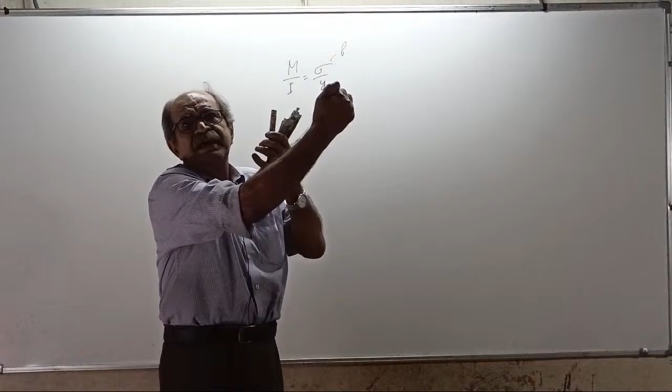M by I equal to sigma by Y. Of course in RCC you don't write sigma, you write F, that's all - sigma or F by Y. But in RCC we don't use this equation. We consider resultant compression, resultant tension by force equal to average stress into area, locate the line of action, then the internal couple - we get the equation there. Not like M equal to sigma into I by Y, but in RCC we get M equal to B x Fc by 2. Fc is nothing but sigma, into D minus X by 3. The other equation is M equal to Ast into Fst, into D minus X by 3.

Here I asked a question - moment of inertia is not considered. You all agreed. Then I told, it is considered, you're just not able to see it. Don't include me, I can see it. If I look there, I can see moment of inertia there. Problem is, people will ask, sir where? There. No sir, it's not there. It is here, sir, I.

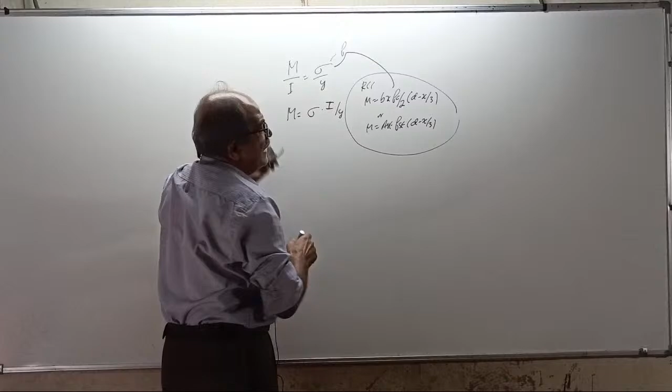See, here you can tell strength of materials I is there. There I is not there. It is there - if it is not there, I will tell you why it happened. I don't want to disclose the place, etc.

Some reputed place, I saw a class online, not now - I won't tell when. Some student asked a doubt, around 1.5 years earlier, during COVID time. He asked, sir, in RCC can't we use the basic bending equation, M by I equal to sigma by y? First answer came within no time - I do not want to tell where, who, etc.

Sorry, if he is seeing the video he will make out, others may not. The answer came: no, you cannot use moment of inertia there. I felt pity for that. See, reputed place, he told we cannot use moment of inertia there.

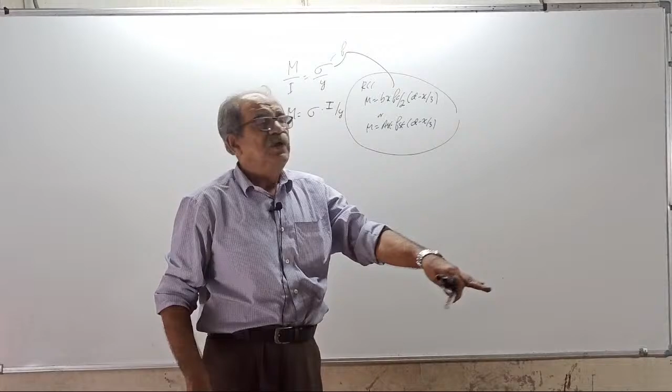RCC separate principle - what separate principle? Both are same. That's why I solved a question by the strength of materials basis, an RC question, and also solved it by the RC equation. Now I asked a question.

Something else, minus is minus. Breadth into distance into stress, same there also - nobody in the world can change it. So anyway, that is the modified version. There you cannot use strength of materials, but you can use strength of materials, you have to go for more rigorous calculation. You can use it.

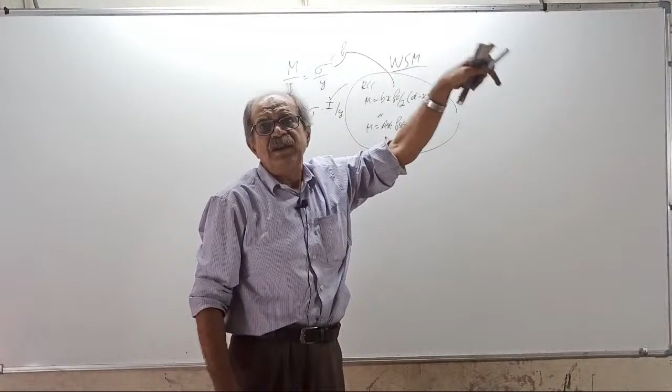Now my question is: did I use it or not? All of you told yesterday no. Then I told, used - tell me where used. So far no answer came. People who are asking for brain teaser, answer it.

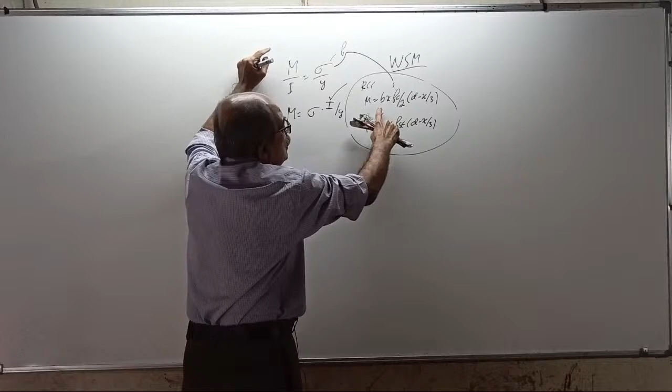I asked you at the end of class yesterday, do you want to get this equation by considering moment of inertia? In RCC, compression area B into X, average stress FC plus 0 divided by 2. Bx FC by 2 is the compression force. D minus one-third X - why? Resultant compression acts at one-third of the triangle, one-third of that X. So lever arm is D minus X by 3. You get M. The other one, AST into FST, tension force in tension steel, into lever arm D minus X by 3. This we derived - nowhere did we use moment of inertia.

So somebody answered that way - you cannot use moment of inertia. This is my reply for them: those who say moment of inertia cannot be used, it can be used. So then I asked you, do you want it or not? So many told, yes, we want it, please.

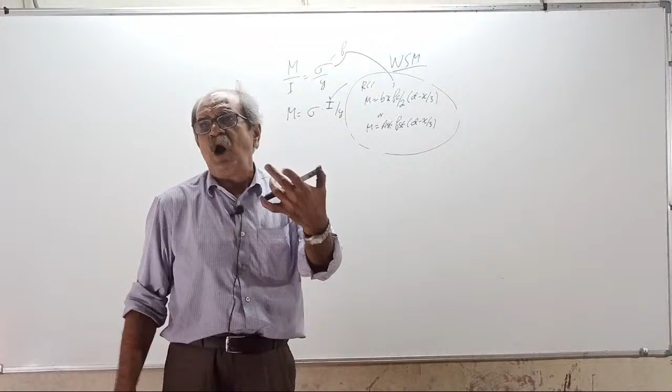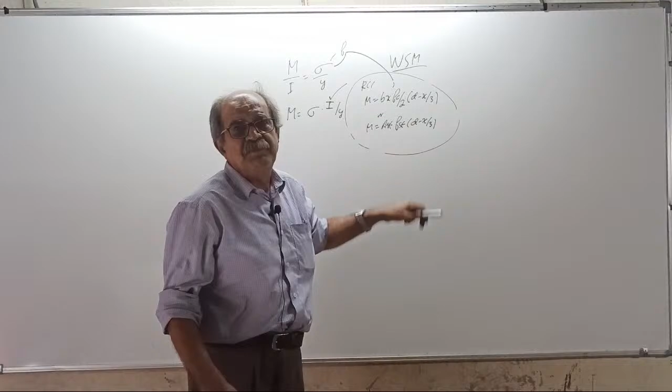Okay, now see the equations, I am removing it now. I will get these two equations now by strength of material concept, using M by I equal to sigma by Y. Instead of sigma I will use F. Okay, see the equation first. Removing now, this will once again appear - I will ask you, is it same as earlier? What I told - you should tell yes, same. You have to tell yes.

Okay, now, one more thing. At the end of today's class I will give one more piece of information regarding section modulus in strength of materials and section modulus in RCC. Some will say, same people, RCC section modulus is not there - what, not there? It is there, I will show it. And in strength of materials, for rectangular section, modulus is, if you remember, Z.

BD - is it capital D? There's no question of small d, capital D here. You can tell BD square by - tell what? In rectangular section, strength of materials, no RC theory - section modulus is, everybody knows this one, BD square by - people know it.

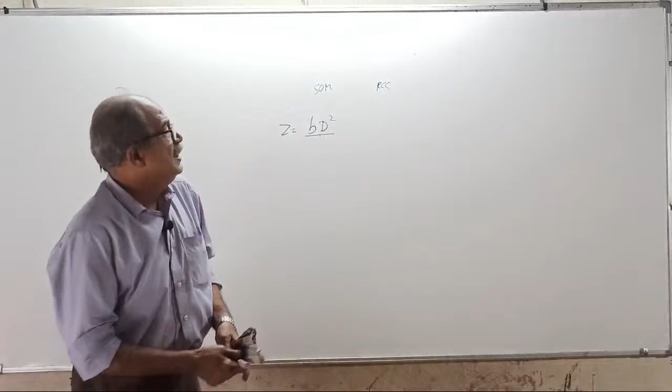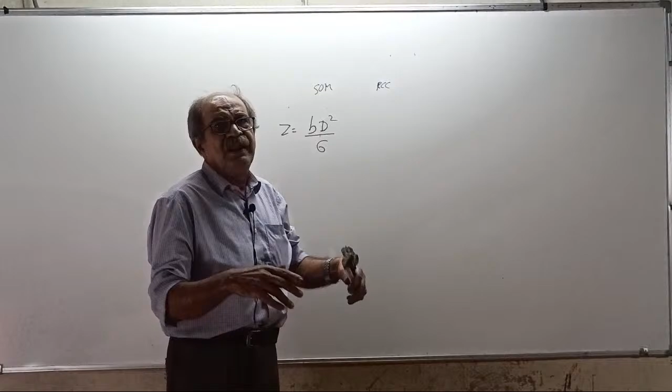6, correct. Today morning I took a class, I asked them, tell me section modulus - they didn't know what section modulus is. When I told them, BD cube by - sir, 12! BD square by 6, sir! Why? Sir, it is - we by-hearted it, in steel, in prestressed concrete, so many places we used it, BD square by 6. They don't know what section modulus is, first of all they don't know the meaning. Then I'll ask, what is section modulus? Sir, I don't know - then you told BD square by, sir, 6? By-hearted. WL square by, they will tell 8. I'll say, who told you I want it for a fixed beam? Sir, then 12. No, I will tell 11 by 192 - partial UDL. Oh sorry sir. Or WL square by, I will tell 9 root 3 - triangular load.

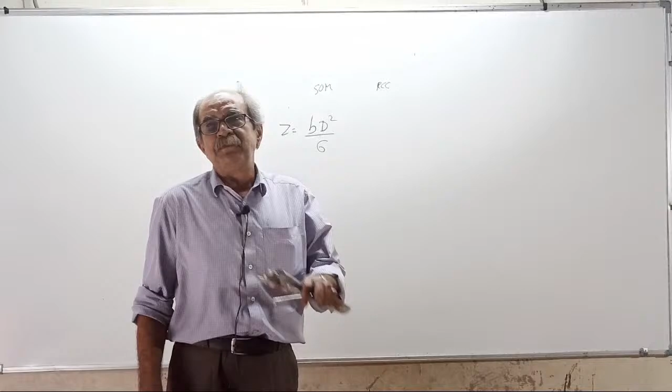Don't commit to an answer unless you hear the question properly. How much? You go to a shop and ask, how much? He will say, how much for what? If a place is selling only one item, roadside, only dosa, you ask him how much, he will tell you 40 rupees because he knows you are asking for dosa. If you go to a hotel and ask, how much? How much for what, sir? For what? See, do not answer the question till the question is completed.

Remember, in my class also, do not comment unnecessarily - I will tell those, unless you know where you stand. Very sorry to tell, sometimes people get into commenting or trying to find mistakes in others. I won't tell the names, I don't want to tell. They think that what they know is too much.

For them, my advice: do not comment that way unless you realize where you are, improve, and reach a level from which you can comment. Not just knowing a little and commenting. Someone actually challenged me earlier, asking can you solve it in 1 minute? I said I can solve it in 1 second. He said then tell me. I said I need not tell you, who are you to ask? I won't give names, but I saw those things. He said nobody can tell me, then show it. I said why should I show it? If I want to show it, come in front of me, have a discussion with me, then realize. I will see that he runs away from there.

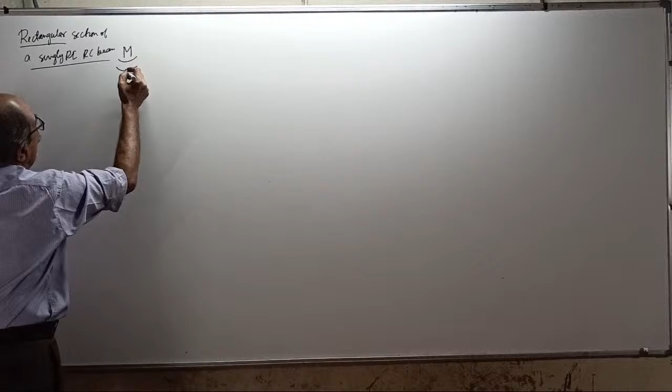Rectangular section of a RC beam. Remember, I am indirectly telling you where moment of inertia is used. Rectangular section of a singly reinforced RC beam, bending moment M, let it be sagging. Why? Because we require compression and tension. Neutral axis is here, not there yet, this is not the neutral axis. Remember, this is working stress method, based on elastic theory, so we cannot go beyond the elastic limit or proportionality limit.

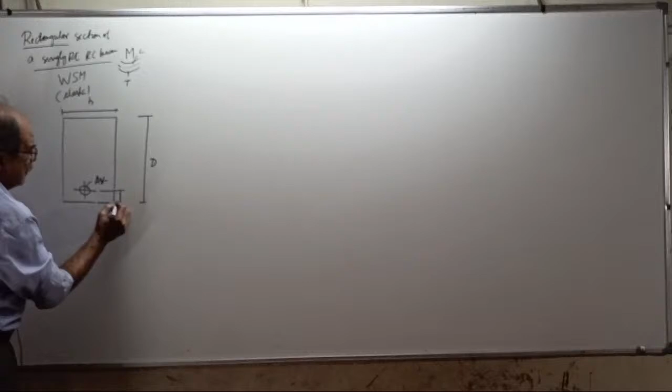See, start, cross section is here, it won't take much time now. This is width B. People ask why the basic bending equation cannot be used for RC. They will get the answer now. This is AST, I will put AST like this. This is effective cover, you write it yourself. So this becomes effective depth d.

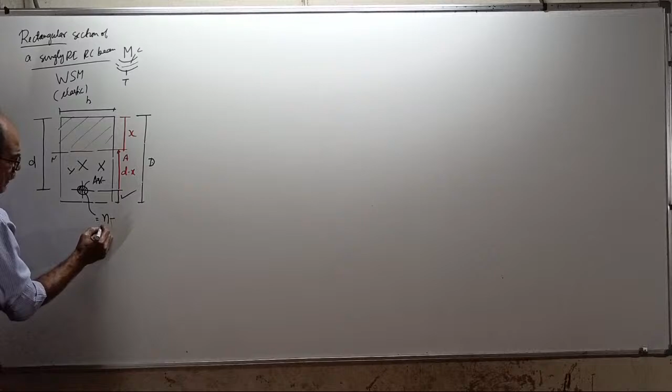Somewhere here, neutral axis. This distance I am calling X. If that is X, this distance will be D minus X. This is the area in compression, this is the area in tension. This is ignored. If AST is the steel area, AST equals number of bars N into the bar area. Suppose it is 4 bars of 20 mm diameter, AST equals pi by 4 of 20 square into 4. Clear? Pi by 4 of 20 square into 4.

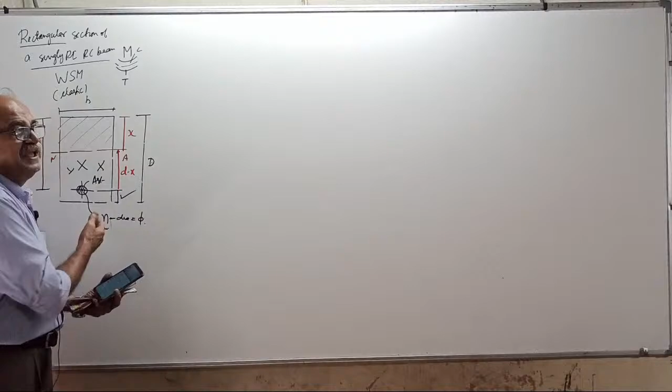Clear? Suddenly there was a sound. Why? He asked why are you explaining again. No, that was some other sound that coincided, sometimes it happens. When I repeat something, they make that sound, and say you already told it, don't tell it again.

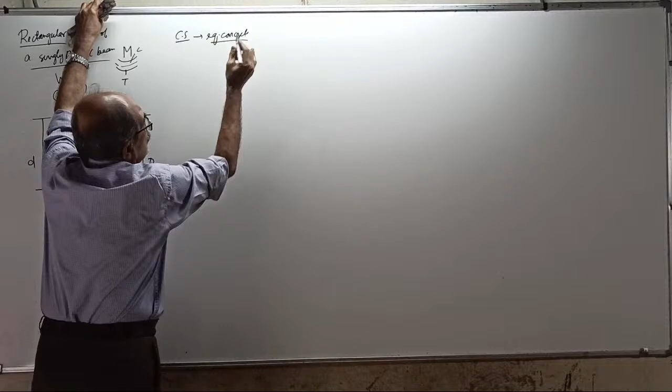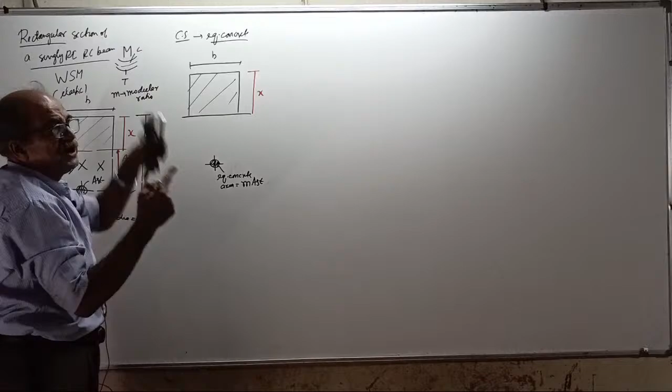See now, consider the cross-section in terms of equivalent concrete. This I already told you, not much new now. Compression is taken by concrete, this is the area, this is B, this is X. X is in red because it's the neutral axis. This is the area of concrete in compression. Somewhere here is AST, the area of steel in tension. So tell me, what is the equivalent concrete area here? Equivalent concrete area equals M times AST, where M stands for modular ratio, as I already told you. I already told you last time so I won't repeat. You should study the previous class. M is the modular ratio. This distance is D minus X.

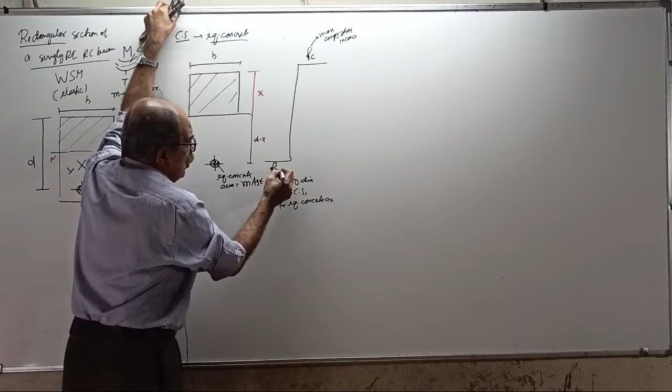Now start, draw the stress diagram here. This is the bending stress distribution diagram across the cross section for equivalent concrete area, that is very important. As I told yesterday, FCC maximum - today for RC I will call it FC, meaning maximum compressive stress in concrete. Here on this side it is stress in steel in tension. But for concrete I will write stress in equivalent concrete in tension, FEQCT, joined by a straight line, passing through the neutral axis, compression to tension. This is for concrete, okay, now start.

Basic bending equation. People say the basic bending equation from strength of materials cannot be used for RCC. Now let's see if it can be used or not.

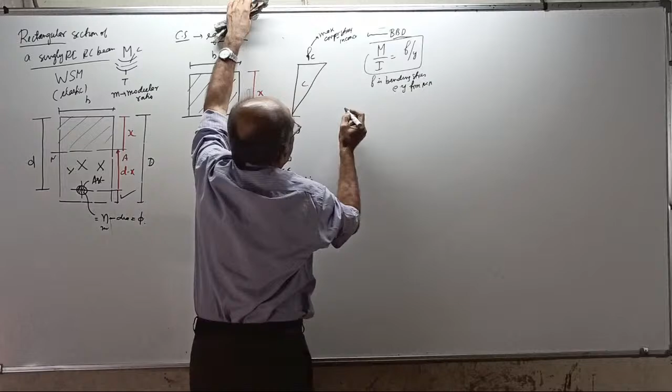Let me see. M divided by I equals, actually there you write sigma by y, here for RCC I write F by y. F is the bending stress at y from neutral axis. That y can be either this way or this way, and now that y and x are different.

Now start. M we want to find, F I will do later. Before that, first you require the value of x. X can be found - that is depth of neutral axis. Neutral axis from, don't say top edge, from extreme compression edge. That is x.

Depth of neutral axis from extreme compression edge - that is called x, can be found by equating moment of compression area of concrete to moment of equivalent concrete area for tension steel, about neutral axis.

Why am I not writing this? Because in yesterday's class or an earlier class I told it. So those who are serious will go and check and write it. Little effort for you also.

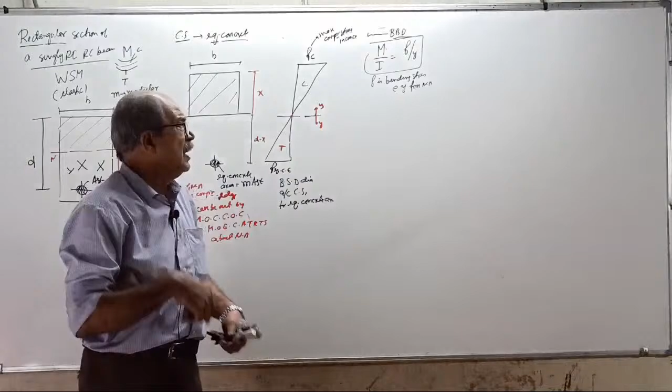That will give you - I already told you, b into x by 2, bx into x by 2 equals this equivalent area, m times ast into d minus x. The corresponding equation, I will put in red color: bx square by 2 equals m times ast into d minus x.

This is pure strength of materials, instead of taking moment about the top edge, we take moment about neutral axis. Last time you know it - both the ways we got the same answer, yes or no? Remember it? Both the ways we got the same answer last time.

Once you got y bar, once the equation, then I gave the simplified form. Yes, therefore leave it now.

Now start. Moment of inertia of the cross section, I want. I about neutral axis for equivalent concrete area - very important. First, I about its own axis, that is bx cube by 12 plus area b into x.

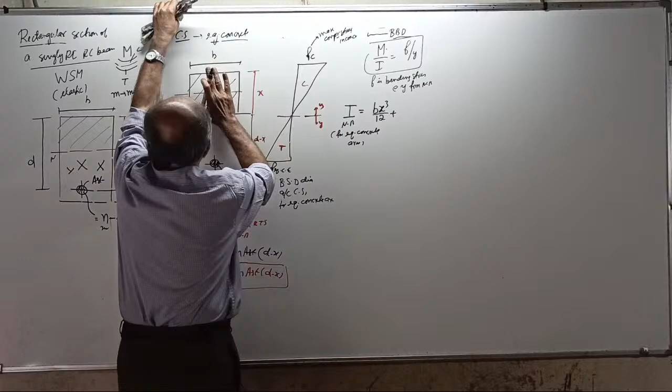If this is not clear, you don't know engineering mechanics - moment of inertia into this distance square, x by 2 square, plus, here n number of bars, let it be n number of bars of diameter phi, therefore pi by 64 into phi power 4.

There can be any number of bars, imagine so many bars are there. For one bar: pi by 64 into phi power 4, plus pi by 4 of phi square is the area, into from CG to here is d minus x whole square. This gives moment of inertia for one bar about neutral axis. There are n number of bars, multiply by n - this gives moment of inertia of n number of steel bars.

I want to convert this to equivalent concrete - tell me, multiply by how much? I want to convert it because that is concrete, I want this also to be concrete. Multiply by m first.

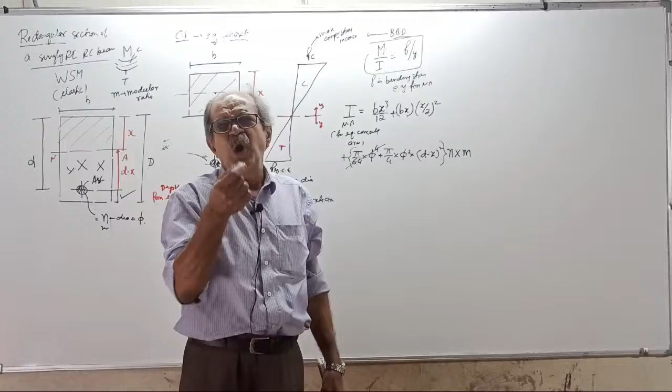Now see, this number you can cut. Tell me why. Because it is so small, negligibly small. You can check later, yesterday's calculation I told you, you can cut this one.

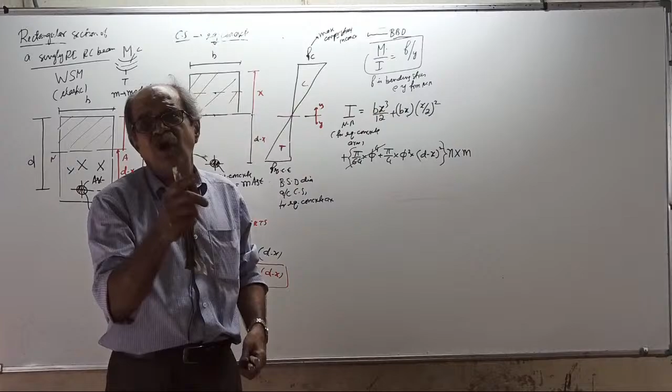If you don't cut, you may get 2 crore 60 lakh 48,000 and 458 rupees. If you cut, you will get 2 crore 60 lakh 48,150 rupees. Someone will say, in a 2 crore transaction, this 200-300 rupees, please leave it, please don't consider. Clear or not? If you want, you check it.

This also I told you - moment of inertia of a circle about its own axis can be ignored if the area is very, very far away. In strength of engineering mechanics, I told this principle regarding radius of gyration.

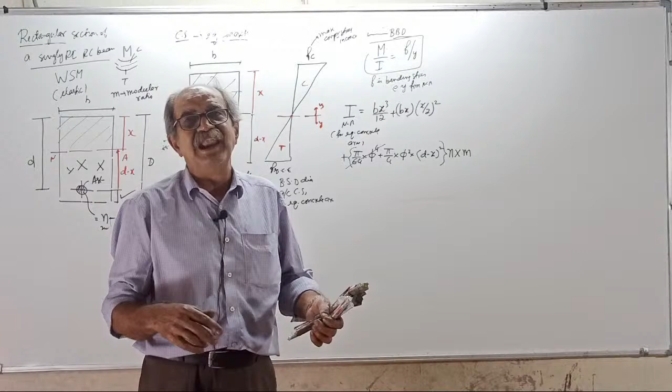See, the term radius of gyration is so powerful. People doing steel structures use it repeatedly, but with regret I have to say majority does not know the real meaning of radius of gyration. They will say, sir, root of I by A - that's the formula. Tell me what is the meaning of radius of gyration. They say they don't know, yet they told you so much about the formula, sir.

Okay, see correctly now. Pi by 4 of phi square is area of 1 bar into n. Tell me what this will give you. Pi by 4 of phi square into n, what will it give you? Pi by 4 of diameter square into number of bars, what will it give you? If you don't know, better not continue the class.

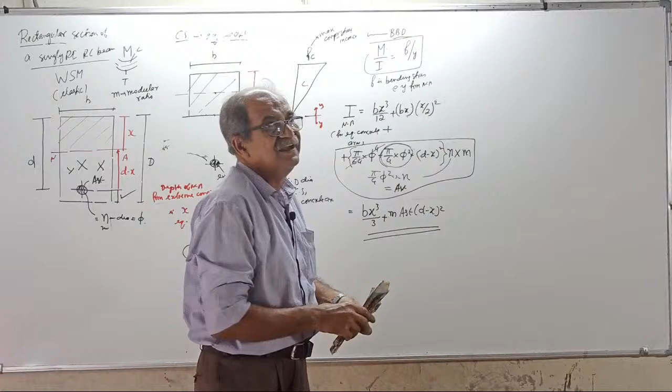Now I will write I once again. So the final result for I is what? I about neutral axis: bx cube by 3 plus m times AST into d minus x whole square. Now I will write it in two different options.

I will do one thing now, I will write this I in two different options, either that way, I neutral axis, or this way. See, start: bx cube by 3 equal to, I will write bx square by 2, x cube by 3 is x square by 2 into, tell me, how much of x? Fast. 3 by 3.

It is bx cube by 3. Bx cube by 3 is how much times of bx square by 2 into... 1 by 6, what is this one? 1 by 3 is 1 by 2 into... what is this mathematics, where did you learn mathematics from? First of all, 1 by 6. Abba, I really feel pity. 1 by 6, I should get back bx cube by 3. Abba, someone told correctly, 2/3 of x.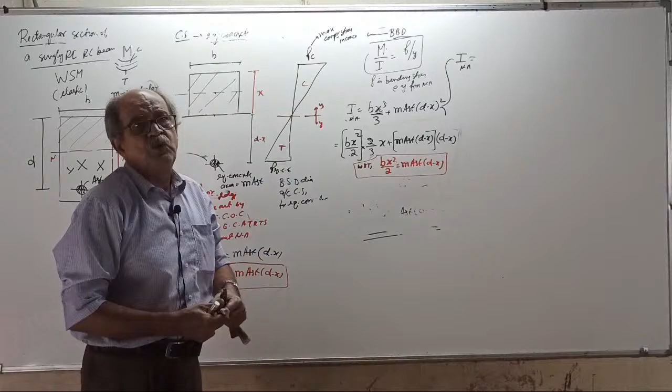Now do one thing. You know that bx square by 2 equal to m times AST into d minus x. Correct? This is for the neutral axis to coincide with CG. See here, already there. Now I will do one thing, once I will replace this M AST into d minus x by bx square by 2.

So if I continue here, option one is your I equal to bx square by 2 into 2/3 of x plus M AST into d minus x. I will once again write bx square by 2 into d minus x. No problem? Tell me, no problem? One option, tell me, any problem? You should tell no problem. Any problem is there, or correct? Any problem, or correct?

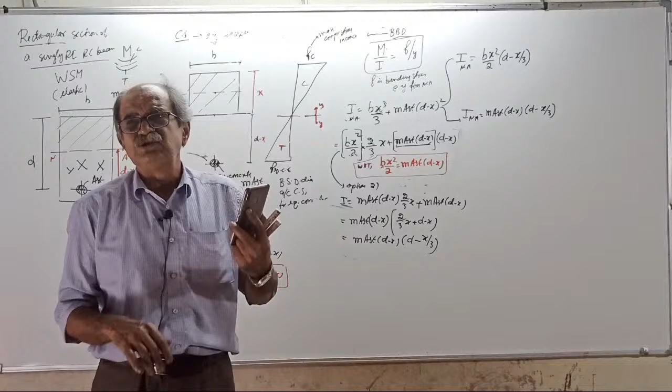Tell me, is all this fully clear? If clear, my work is over. If everything is clear, see, don't learn these by heart. Understand and enjoy. When such a concept comes, you don't have to bother who is using it. But unless you know the answer, do not tell somebody that something is wrong.

Clear? Okay, now I will remove everything and maintain only the basic bending equation. I told you these are the two options of I. Now start. Consider M by I equal to f by y.

Substitute f equal to fc, meaning the maximum compressive stress in concrete. Then tell me, what is your y? If I want this stress, y is measured from the neutral axis. Y is the distance of the fiber from the neutral axis. If I consider the top fiber, that is the compression edge, I put f equal to fc. Then what is y equal to? This time, y equal to x.

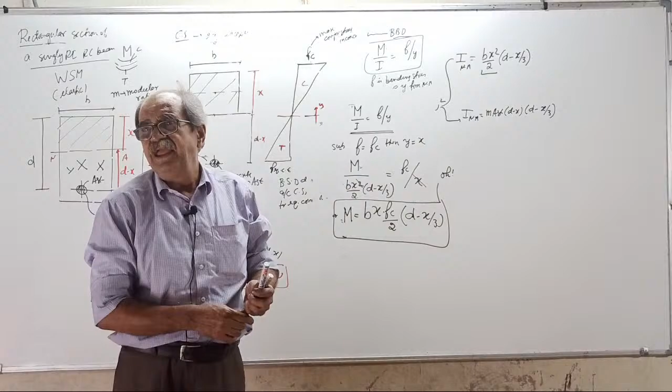Is it the same answer or equation I got by RC theory? There you did RC theory, lever arm, resultant force etc. Here we used the basic bending equation, we considered moment of inertia. Is the answer the same as earlier? Is this the result I wrote earlier? Is this result same as that result? Yes. Therefore, my life is saved.

Reputation at stake, now it is saved. Good. Therefore, you tell anybody you cannot use the moment of inertia concept for RCC, for working stress method, you do not know the subject. That's why you say you cannot use it. You can use it, but in RCC we don't use it this way; you go for the transformed section there and consider force and lever arm. But remember, even that also came from basic bending theory only.

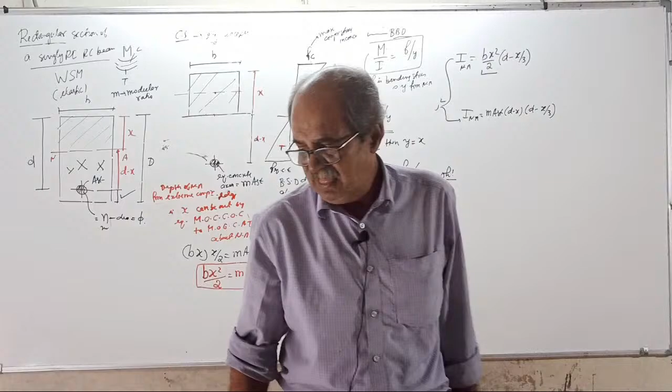Tell me, fully clear? Then somebody will ask me, okay, this is based on compression, you got it, what about tension? When compression came, in tension is it something special? I will tell you, tension. You are special, now you also come.

Tension, see, second one. Once again consider M by I equal to F by Y. Now M is M, I is I, but I will use this I now because I want tension. MAST into D minus X into D minus X by 3 equal to, tell the answer, I want to write stress equal to FEQCT.

FEQCT means stress for equivalent concrete, or tensile stress, stress for equivalent concrete area in tension divided by... Now my Y should be what? When I consider that, my Y should be X. Now tell me, when I put F equal to FEQCT, what should be my Y value? Y is distance from neutral axis. D minus X.

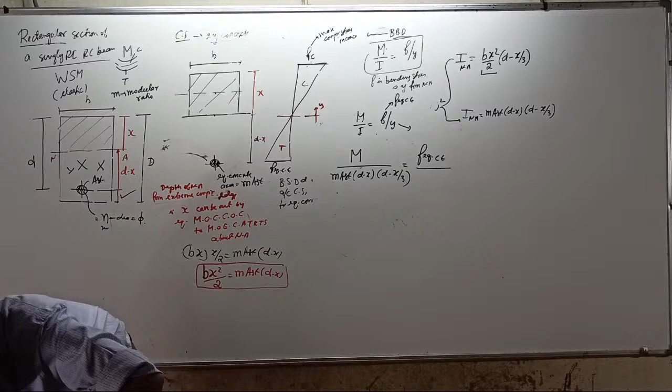D minus X, now D minus X gets cancelled. Or your M equal to, see here, go that side. MAST into FEQCT into D minus X by 3.

But did I use M in the second equation earlier? I am getting a little confused now. Did I use M in the second equation there? Tell me. I wrote M equal to BXFC by 2 into D minus X by 3. Second, I wrote AST into FST into D minus X by 3.

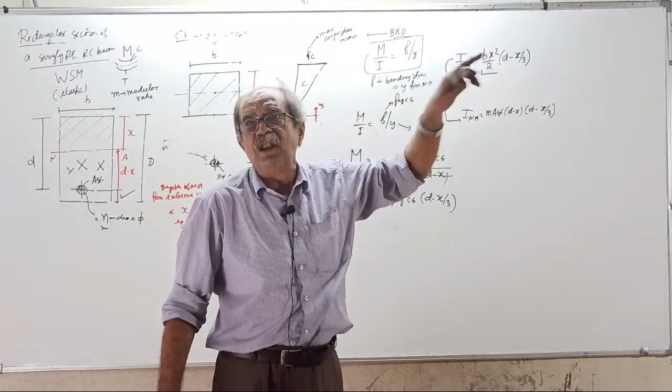If modular ratio is not there in one and it is here in the other, my complete reputation is gone. Then I am going to close the class once for all. In future, I will not take the class. I told a different equation on principle. There M is not there. Here M is there, means I have no moral right to continue even one micrometer.

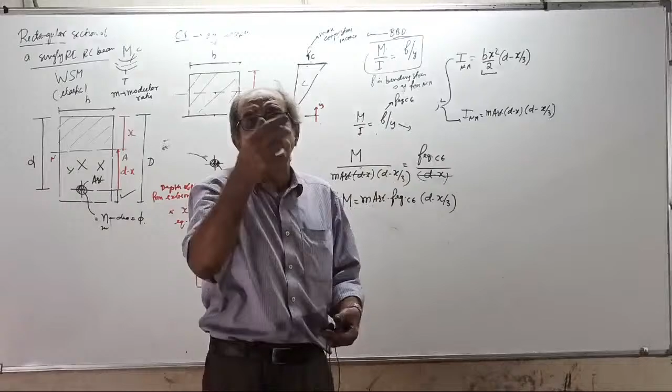But, one minute, I am not going to close. I went non-stop for 1 hour. Little voice problem, I want a 5 minute break. No problem, 5 minute break. When I come back from the break and ask you, you should tell me there M is not there. Here also M is not there. I will go there, from there using what? Using some supernatural power, I will pull this M. Hey M, you come there, don't stay in the board. I will pull the M. M, you are unwanted here, vanish or get out. When I come back, you should tell me yes, M is not there.

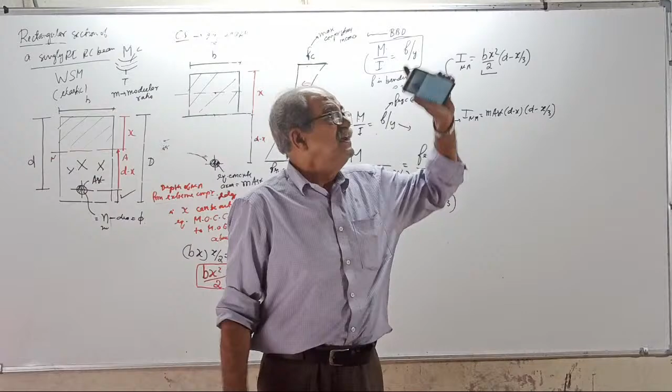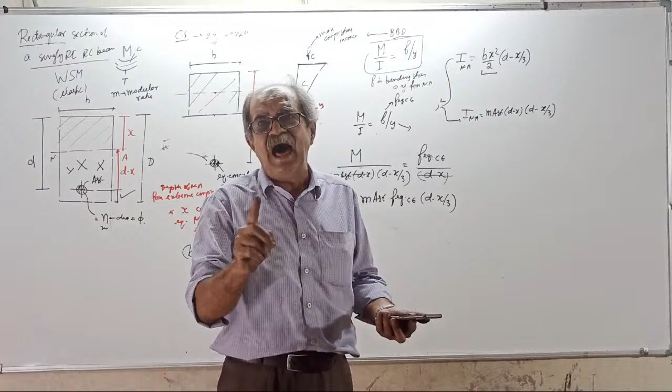Okay, no problem, 5 minutes break, for you to think. Think and comment. You should not tell in my class that this time it is this way and that time it is that way, that time divided by 2, this time divided by 3, that time x, this time x square, there m is not there, here m is there - my class is not like that. Whatever is there, same here, absolutely. It is impossible that you will get a different equation. This M has to vanish now. You can comment and tell what happens next. This M will vanish, therefore what will happen? You get back the RC equation only, so the class can be continued. You tell me with reason that class can be continued. Let me know how many are able to understand. I will tell it, don't worry. For that matter, I never got panicked.

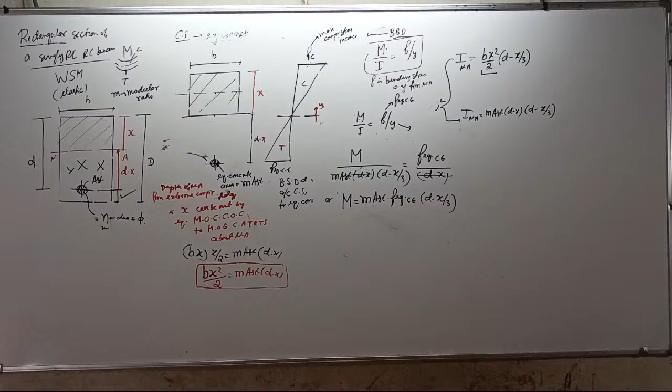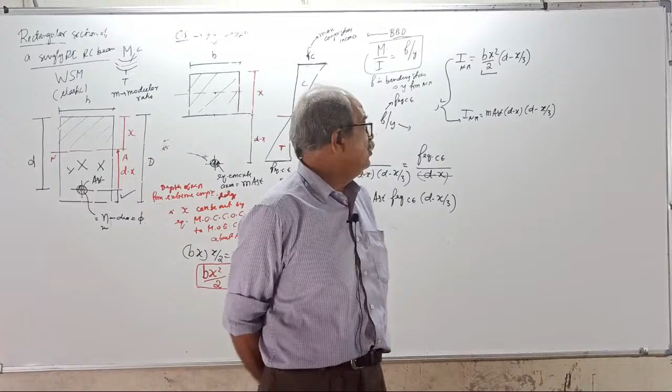Okay, start. Not a very difficult one. But what happens is sometimes people become happy when they see it. When I told earlier, see, there M is not there, here M is there - me, don't know. Some will celebrate, why? Finally he got stuck somewhere. That celebration will be short-lived. Without knowing the concept well, I will not talk this way. Do you think I will talk this way without knowing the real concept?

Okay, now remember, this is not your FST. This FEQCT is stress in equivalent concrete area. Okay, that will be equal to what? That will be equal to FST, that is the stress in steel in tension. Tell me, multiplied by M or divided by M?

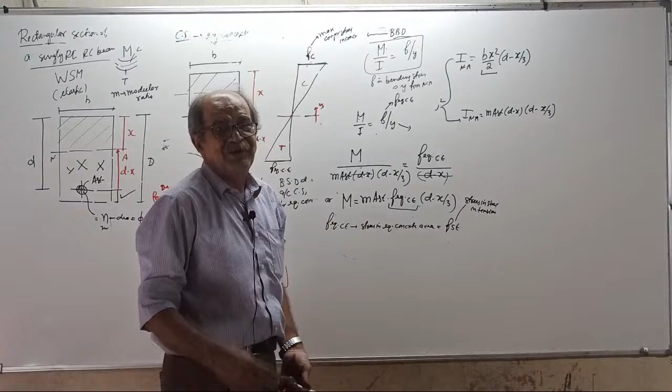Now people will tell, sir, if you want to remove the M, what to do? Tell me, you will tell the answer, because you know the answer. Divide by M. Don't just tell divide by M because I want to remove that M.

Because stress in concrete equals steel stress by M, or stress in steel equals stress in concrete into M. Therefore this is equal to M times AST into FEQCT divided by M. No, M times AST into FST by M into D minus X by 3. M will cancel, so you get M equal to AST into FST into D minus X by 3. That is the answer.

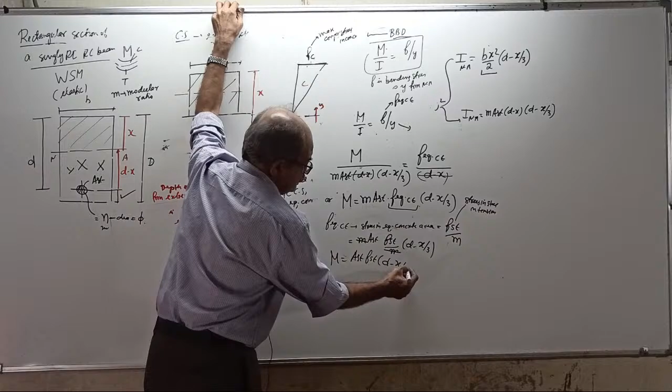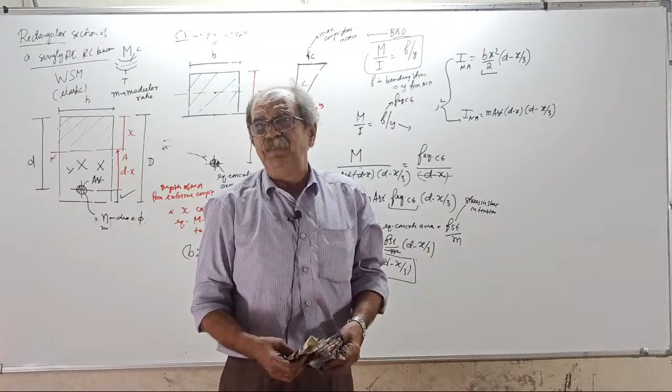Now, are you fully agreeing? Using moment of inertia concept also, RCC expressions can be derived. Tell fast, RCC expressions, but nobody will do it this way, because that is not the simple approach. But even basic bending theory can be applied for RCC also, but you require using moment of inertia. Fully clear? Yes.

Okay, now last part of this one, all over now, nothing further. Now I am quitting RCC. But before quitting RCC, I want to tell one thing. Once again, brain teaser, last part today. Real brain teaser. If anybody gives the perfect answer on YouTube, I will appreciate it. For any question asked by me on YouTube, you should not answer on my personal number. Personal number means I don't see it first of all, or I may see it and I will not answer it. Let the people know that you get the answer.

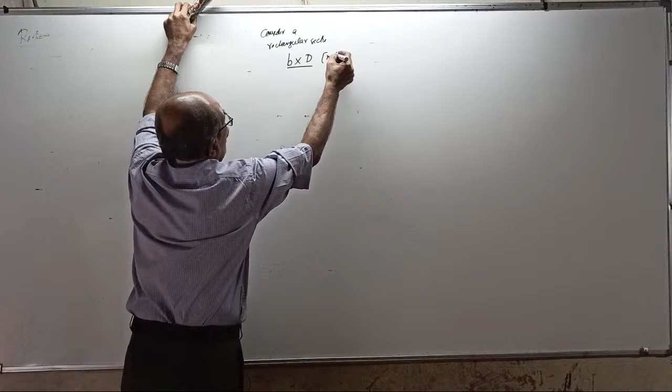See, small part, little later we get. Consider a rectangular section, B by D. This is not RCC, not RCC of just any material like steel or timber, not composite. Only one material, only one material.

One material. We know that M by I equals F by Y now. Why F? Because in RCC I am using F. Tomorrow onwards, next class onwards, I will go to sigma. Only today F by Y. If this is B, overall is D, there is no effective depth here. Neutral axis comes here, each of them is D by 2, D by 2. Stress diagram will become like this.

Correct? Both are equal. Now this is your FC maximum. If the BM is sagging, this is your FT maximum. Okay, I will tell FC maximum now, that the BM is sagging. M by I equals, or you can tell M equals I by Y into F, or you can tell M equals F into Z, yes or no, where Z is called section modulus.

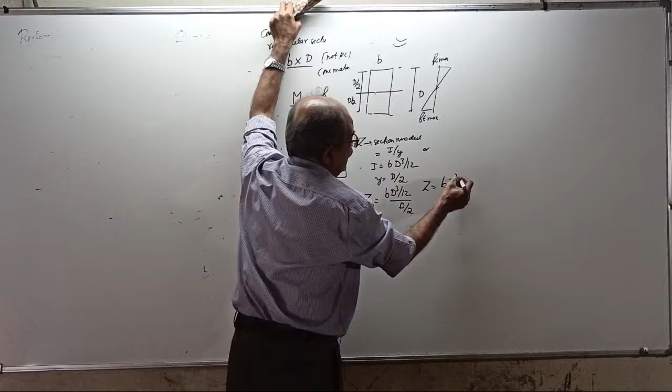Section modulus equals I divided by Y corresponding to extreme fiber. I equals BD cube by 12. Y equals D by 2. Therefore your Z for rectangular section of only one material, not RCC, equals BD cube by 12 divided by D by 2. Your Z will be equal to, tell the answer, people know this answer, BD square by 6.

Therefore, for a rectangular section of only one material, I will do one thing now. This FC maximum, I will tell F only, I will tell only F. Okay, one minute. Okay, I will go for FC, I will go for only FC maximum.

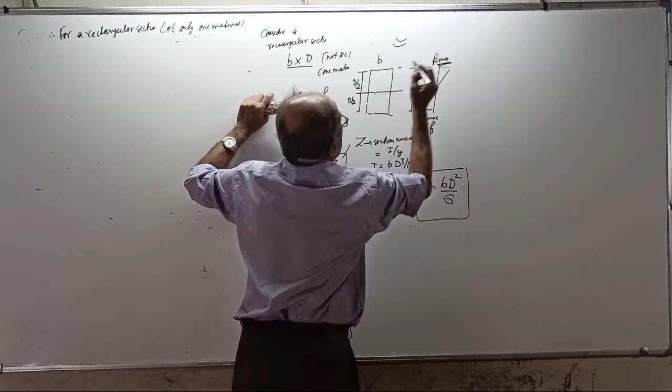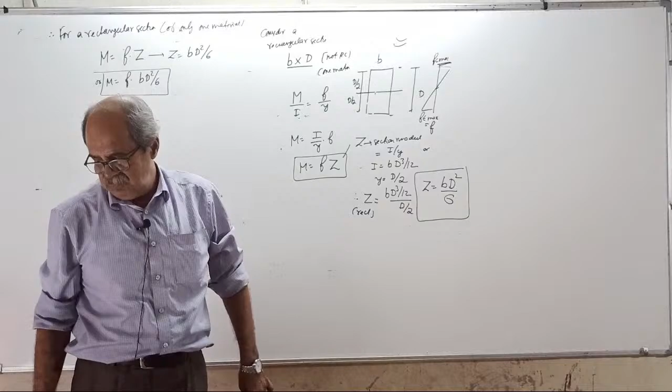Only one material and no effective depth. Your M equals what? F into Z, where Z equals BD square by 6. Or you can write M equals F into BD square by 6. Correct or wrong? First tell me, is the equation correct? People who want brainstorming or brain teaser, answer the question now.

Yes, now I will come to RCC. See, in RCC, capital D is not used, tell what is used. Okay, I will leave that one now. Come to RCC, sagging BM, once again. This is the cross section, somewhere here is neutral axis. This is called X, this is called B. This is called AST, tension side, not required for me.

Tension side, start. Here, your M equals, come to RCC. M equals BX F by 2, FC by 2, BX FC by 2 into D minus X by 3. Tell me, yes or no? Fast, already derived. Correct? Almost closing now.

Now, some people will tell section modulus theory is not used in RCC, that it's not applicable. I will tell you why not applicable. No sir, it is not applicable. I will show it is applicable.

Wait one minute. Now consider, for understanding, a balanced section. If it is a balanced section, using the working stress method.

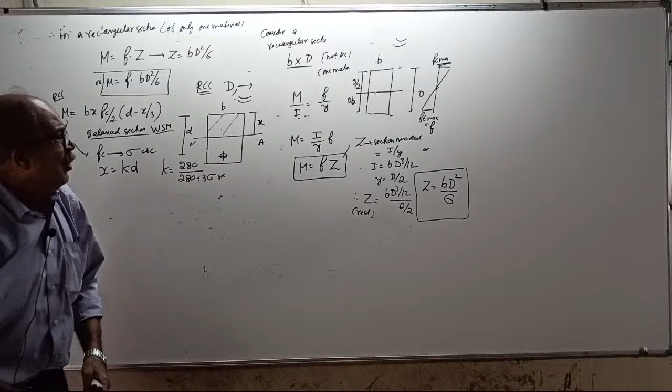Now see, lever arm, that is A equal to D minus X by 3, or equal to D minus KD by 3, or equal to D into 1 minus K by 3. The term, this K is called... those who want, write it down. But remember, don't write too much.

Why? Then they will tell I'm teaching RCC. No, I am not going further in RCC. I am only showing people that they shouldn't tell wrong things. This is called the neutral axis constant for a balanced section.

Here you can write this as JD. In the JD, I take J. This K is called the neutral axis constant for a balanced section.

I can talk about under-reinforced and over-reinforced sections also, but no, this is not an RCC class. Better to stick with balanced. Somebody will ask what is a balanced section? Study RCC. JD, J is called the lever arm constant for a balanced section.

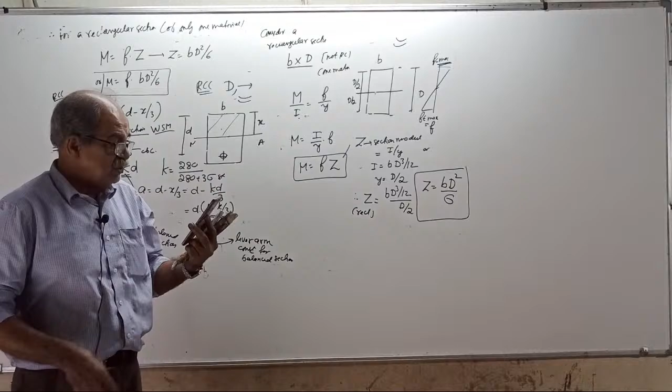Tell me, those who came to my RCC class, not ETAP people, since ETAP people are not taught the working stress method. Those who came to my RCC class, do you remember all this? At least if anybody is there... nobody, one person is there, not answering. Those who came to my RCC class, either offline or online, do you remember all this?

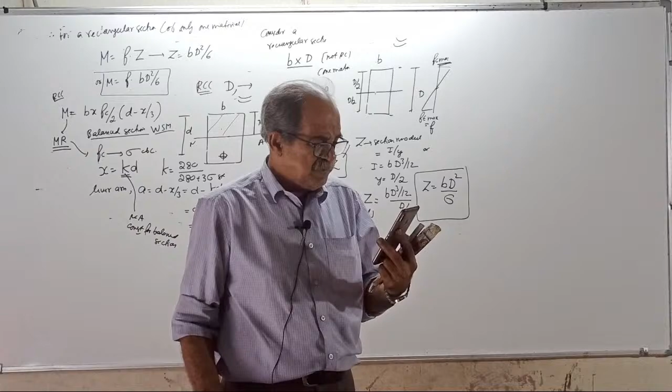Therefore, your moment of resistance for a balance section, for a singly reinforced rectangular section in RCC working stress method, is what? It is B into X equal to KD, into sigma CBC by 2, into bracket D minus X by 3, which is JD.

Or your MR equals, see here, B into D becomes BD square into, usually people call it Q. That Q is called the MR constant for a balanced section.

Okay, start. Now leave it as it is. So therefore, remember, in RCC also, Z will come.

Yes or no? Note their BD square, 6 you leave it. That 6 only is the brain teaser. Those who think they know too much, now tell the answer. See, QBD square, here BD square by 6.

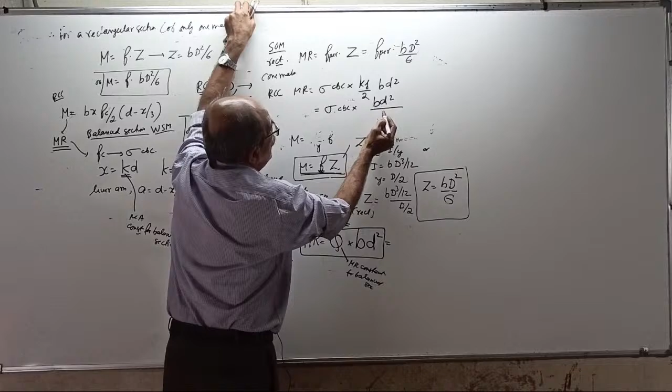Or if I want BD square by what? Tell me. It is sigma CBC into BD square by 2 divided by Kj. Correct? 2 divided by Kj. Is it correct? 2 divided by Kj, correct or not?

If I put the full format, I want same format. See, there this is permissible stress. RCC also, this is permissible stress. In both the places, one number is permissible stress. Tell yes or no.

When you tell MR, in both the places that is strength of materials, in both the cases. What both cases I told you? You write here, strength of materials where section is of only one material, no RCC, MR equal to what? It is permissible stress into Z. Z is section modulus.

That Z equal to BD square by 6. In RCC, this is usual strength of materials, or one material. RCC, MR equal to, once again, this is permissible stress only. It is permissible stress into, I will put once again Z.

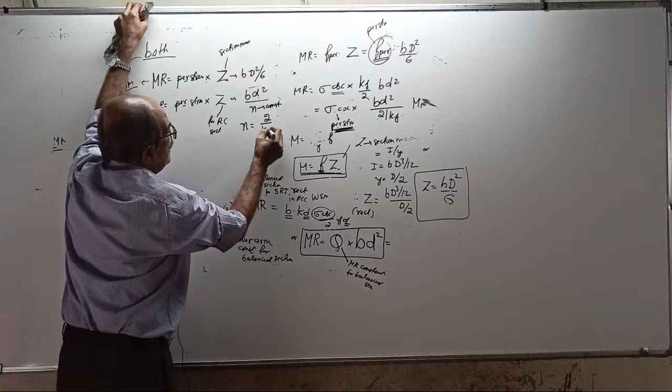I'll put number. That number or constant equal to 2 divided by kj. Yes or no? 2 divided by kj. Everything correct? See there, any mistake is there? Most probably correct.

Okay, now therefore, here also Z principle comes. Why not BD square by 6? Because here, upper side, one side compression rectangle, other side tension steel equivalent. So disturbance will come. Now, just to understand the purpose, see.

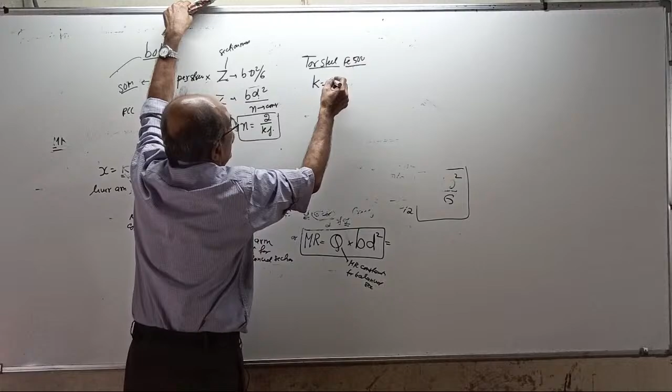Suppose it is M20, better. Suppose you are using Tor steel of grade FE415 or FE500, popular steel. I know that K will come approximately, exact value I will put you. K, I know it, you don't answer. Don't ask me how to get it. RCC, I know little RCC also.

Okay, 280, 275. K will come 0.25333. Your J will come 0.915535. Therefore, in that case, that number will come 2 divided by 0.25 into 0.915535, equal to 2 divided by 0.25, divided by 0.915535, equal to 8.738. If any mistake is there, you correct it.

If any mistake is there, correct it. In case any mistake is there, half into 0.29 into 0.9 equal to reciprocal equal to 7 point. Okay. If any mistake is there, correct it.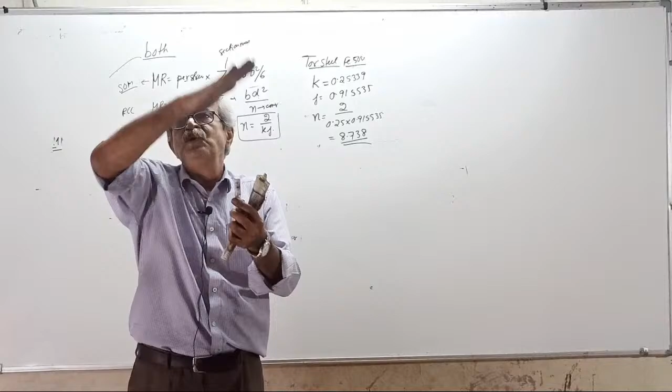Remember, in biaxial bending of column, for axial load, we consider PU by FCK BD. For bending, you consider MU by FCK BD square. Remember, you consider MU by FCK BD square. Tell yes or no, RCC column design. Remember it? MU by FCK BD square. So people who tell section modulus theory is not there, they do not know the subject.

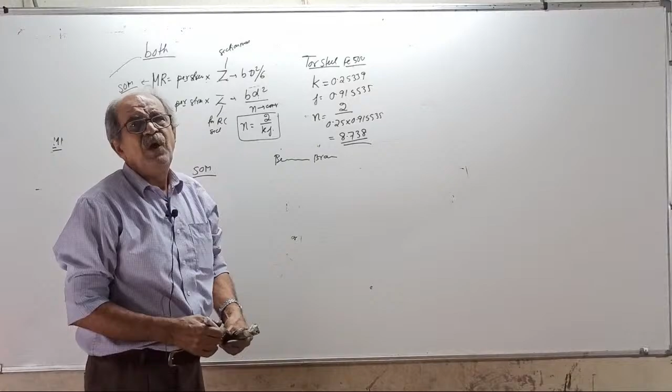Okay, now one beautiful brain teaser. Rectangular section in strength of materials. Strength of materials means ordinary section with only one material. Your Z equal to BD square by 6.

In RCC, if I use Tor steel of grade FE500, then your K is 0.25339, your J equal to 0.915535, your Z will come BD square by 8.738.

Now, by chance, if your K is more than 0.5, just imagine. For mild steel, K comes to 0.53, but that value is not used that way. Or imagine K is more than 0.5 - it is possible with very low strength steel, like 280 grade. 0.53 comes in limit state method. If I put a very weak steel, nobody can tell, for some particular value of sigma for weak steel, I will get K more than 0.5.

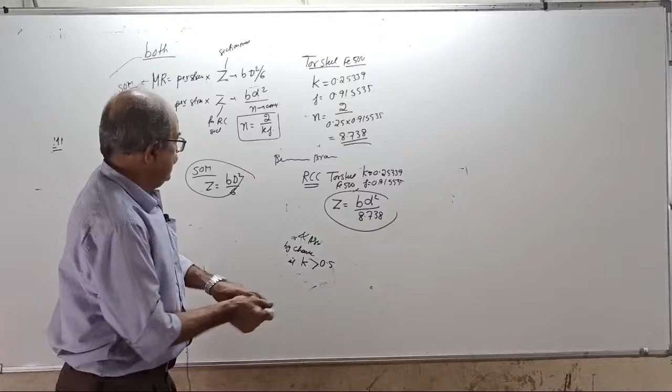If K is more than 0.5, then J equal to 1 minus K by 3. Or you do one thing, take K equal to 0.5 only. If K equal to 0.5, tell why - then neutral axis will correctly come to center. Yes or no? Neutral axis at 0.5 is better.

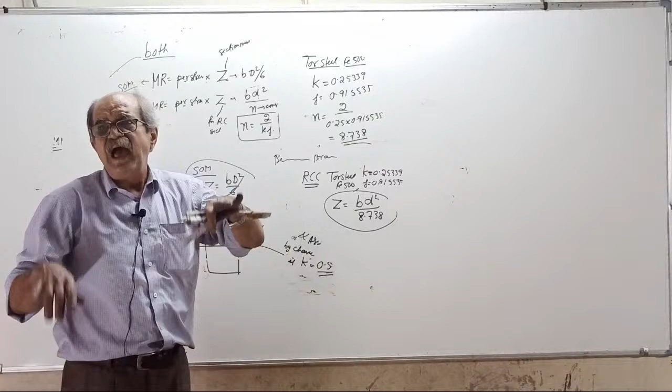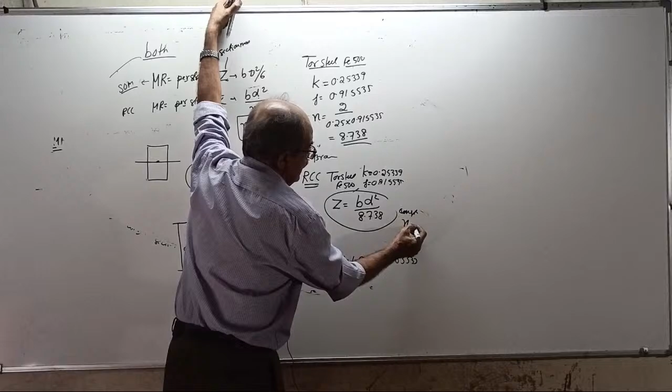If K is 0.5, if this is D, neutral axis comes exactly to center, 0.5D, correct? If K equal to 0.5, neutral axis comes exactly center - that is same as rectangular section, since the remaining portion is removed, only D is considered. So if K equal to 0.5, neutral axis comes to exactly center of D, then your J will be equal to 1 minus 0.5 by 3, which is 0.83333. In that case your MR will become - that constant number will become... 2 divided by 0.5 divided by 0.833 equal to 4.8.

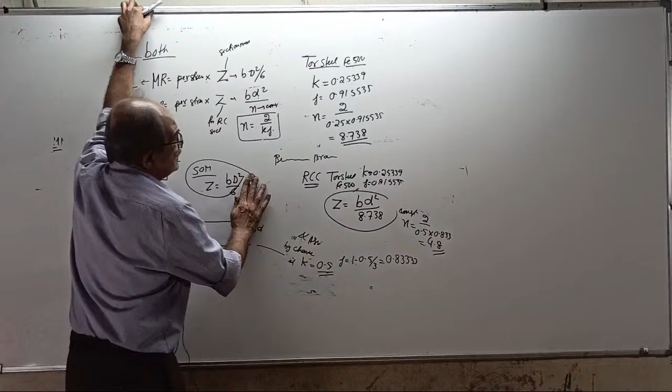Correct? Okay, now my brain teaser question - those who want to answer can answer now. See, I write here now, everything I am removing. 4.8. What answer did it come to? Oh, first answer I forgot now, I can do it once again - 8.738.

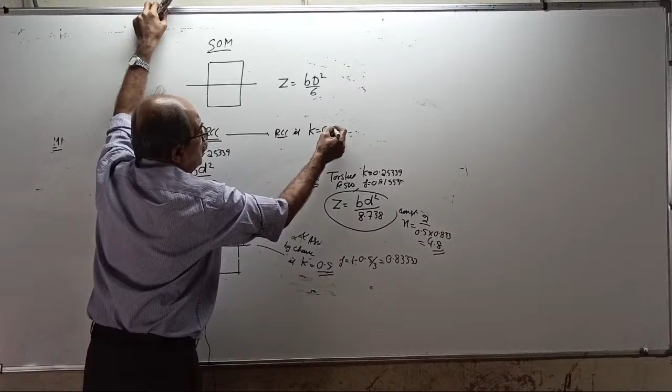See, strength of material, only one material, no composite: Z equal to BD square by 6. Now, in RCC, when I used Tor steel of grade FE 500, where your K is 0.25339, I got Z equal to BD square by 8.738. Whereas in RCC, if by chance K equal to 0.5 with some other steel, then my Z will come BD square by 4.8. Now those who want to answer the question can answer.

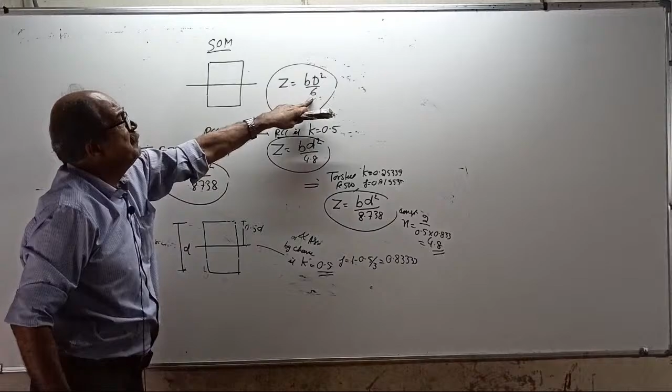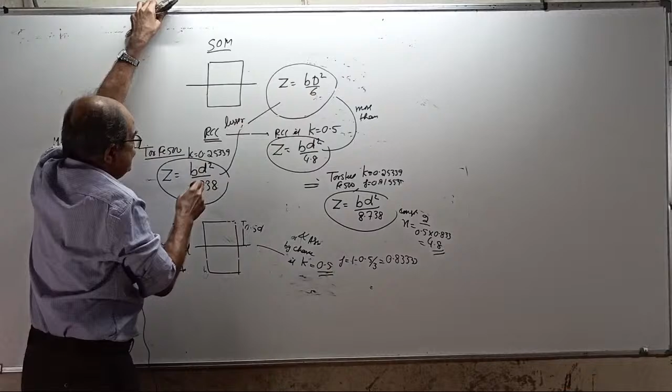Here 1 by 6, I am closing now. Here 1 by 8.738, here 1 by 4.8. Therefore, if I use Tor steel of grade FE 500 with 0.2533 in K value, my Z is lesser than rectangular section. But this other case is more than rectangular section. Question clear? One RCC example, my Z came to 8 point something, which is less than 6. Why? Because it is divided by 1 by 6 versus 1 by 8 point something. So standard for rectangle is 1 by 6.

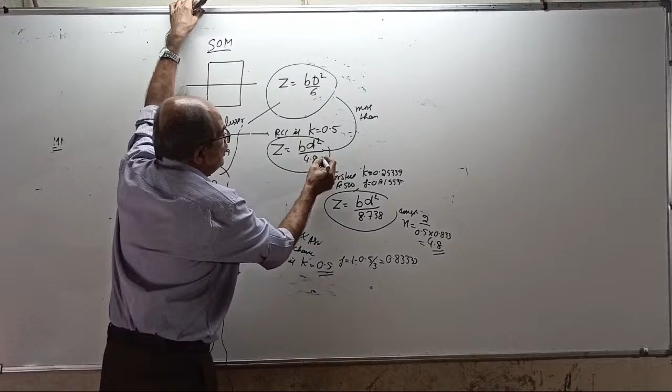When I used RCC for working stress method with FE 500 steel, I got Z equal to BD square by 8.738, which is less than that for rectangular section of one material. Whereas if I use some other steel where K is 0.5, then my Z came to BD square by 4.8, which became more than rectangular section. Question: why did it come lesser, why did it come more? Think about the perfect logic.

Those who are serious, really you have to think. If you think, you may get the answer, but tell the answer on YouTube only, do not send anything in personal messages. I will wait for the YouTube answer. Of course, this is not an enjoyable brain teaser. What I will ask later will be more enjoyable brain teasers, because some will say sir, we never came to know these things.

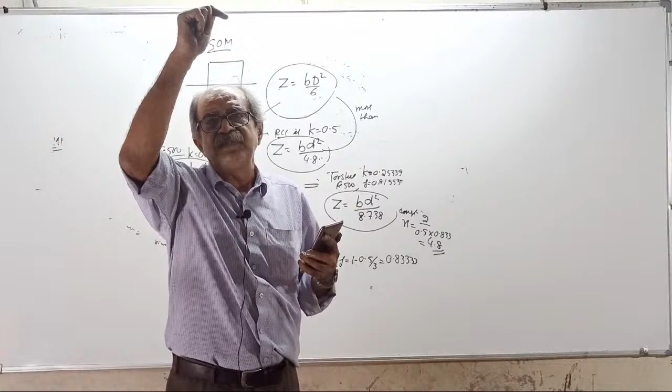This is because today I am closing RCC information here, so I thought let me tell this one. But don't take it too seriously - the real brain teaser I am asking is beautiful. I will ask how sigma m can be used a second time, or just to left, just to right - I already told you this in class number 100 somewhere. Many people still don't know it. Okay, now we will meet in next class. I will not discuss RCC in this class - I will continue from class number 3, entering perfectly into the strength of materials part of basic bending equation.

Okay, start - now all these will not come. Waiting for the answer. Nobody should say in future that moment of inertia cannot be used in RCC, or that section modulus cannot be used - it can be used, but with proper knowledge. That's all, okay, thank you.